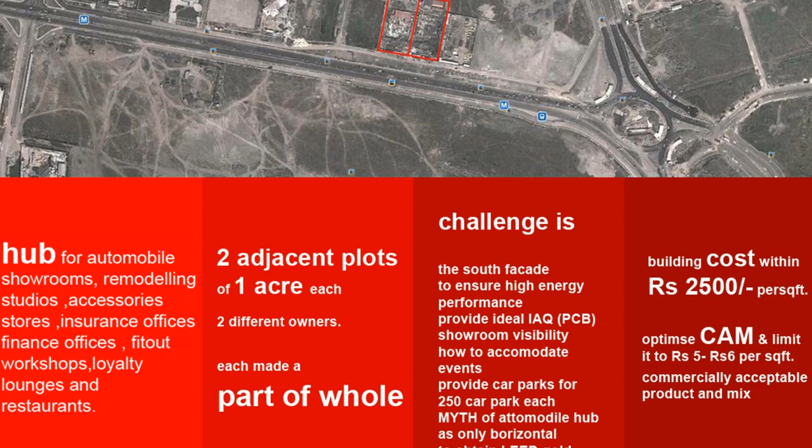The other challenge was how do we take the workshop, which is on a high level, and give it a facade that made sense to a car or an automobile. It's a character we had to weave in, which had to do something with technology. There were offices also, which were also looking in front.

All the adjacent plots had buildings, and we didn't want to look straight into them. Neither did we have the liberty to carve out offsets of gardens and greens. So it was almost like a tight site, wanting to survive mathematics in depleting real estate. That's where the facade plays an important role, and I want to take you through the journey.

So the entire thing started with a site. As I told you, they wanted a site, and they also wanted the building to perform better. A green building is okay, but beyond green or LEED certification, what can we do?

We tried to say, let's get what the city lacks. The city lacked green altogether. We didn't have green, and this 2 acres barely could provide any virgin green. So we looked also at the program. Can the facade also take care of green? Can we actually have substantial green on the facade without reducing the FAR?

There was a need to get quality air induced into the building, because south was the highway, and Rajarhat, being a developing new town, has more dust in the air, which actually can be tapped for fresh air. So we had to do some kind of filtering in the system also.

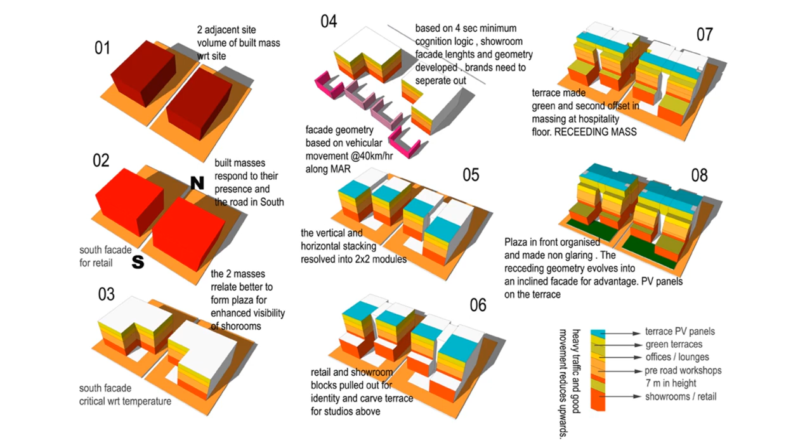The workshop, which basically caters to the pre-road fit-outs and a little bit of cleaning, was about 7-meter heights, which didn't need as such a presence from the roadside, but wanted to take in light and fresh air, and was not conditioned. Above that, we had offices which had the view as well as everything right in front facing the sun.

So we took a story from the top. We had offsets which take care of green. The green would reduce the glare, because normally these huge extensive glass facades add to the glare on the road. While driving, there would be a sharp glare on your windscreen, from your building reflecting a lot of sunlight and glare onto pedestrian traffic as well as vehicles.

To add to this, we also had a metro moving at a level almost about 11 meters from the ground level. That was another kind of noise we had to cater to. So we were actually looking for a kind of opaque performing facade also.

On the above levels with the offices, we tried to take care of layering of PV cells. Can we actually encapsulate a skin system which will have polymer solar cells that will add not only to reducing the glare component and insulation, but will also help in producing energy, so as not to be too impervious to allow for the view.

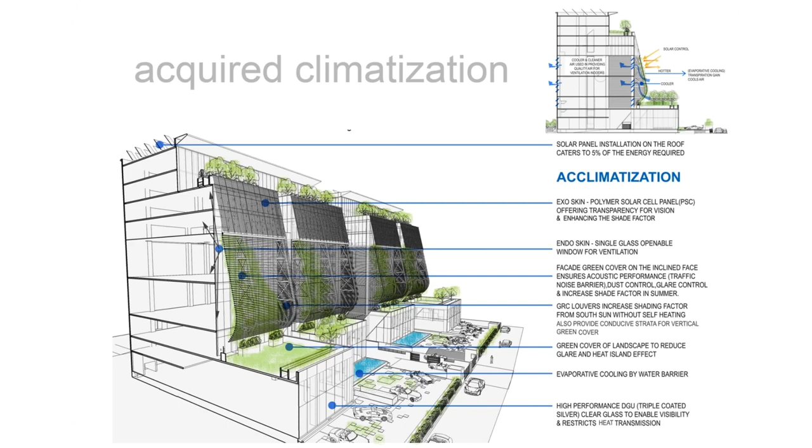In the lower level, when we had the workshop, we had a skin system which had an exoskin system with GRC louvers, and the massing was done in the manner that they were formed as building facades, with a louver system which would allow the wind to pass through.

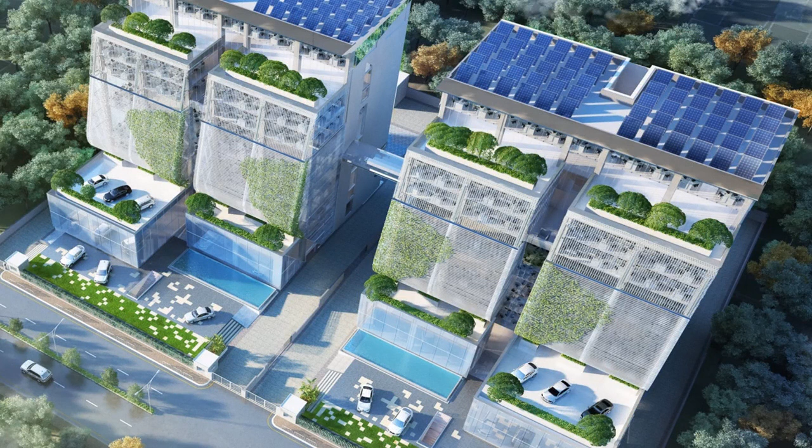The plantation above would actually increase the green proportion and reduce the glare, the reflected glare basically. That filtered air which goes through those green louvered facades was tapped and taken inside the workshop, allowing fresh air from there.

Because it was green, we could expect a certain amount of transpiration performance, reducing the heat load. So that would add to a little better performance in terms of fresh air and reduced temperature, adding to the indoor air quality and temperature both.

In this entire effort, we were giving birth to a huge green facade in the design, making the entire process interesting and intriguing. This would keep on growing over the years, making it much more green, because Calcutta as a city is lacking a green cover, and the entire effort was, can we add to a visual green?

GRC instead of aluminium helped us with the louver system to take care of the extreme heat, because the extreme heat of metal would not allow the creepers and the green to grow onto them. GRC allows that to happen.

In the lower levels, we had the reflecting water pool, which actually enhanced the local performance in terms of temperature rating, etc., in the plaza areas.

The plaza was done basically having the building blocks structure themselves, making a big plaza, which would take care of a second showroom. It would actually have a second cars' open air showroom, or a flea market kind of system. So not only were they selling new cars, they would also allow Wednesdays or Thursday evenings to have the second-hand open car layout in the entire front area.

So it's a building which will actually bring in a culture of how we see cars and how we associate with cars. And when we have hybrid cars going on electricity, we should also have buildings and facades which generate more electricity, reduce glare, produce more green, and have a character which is much more sensitive and future progressive.

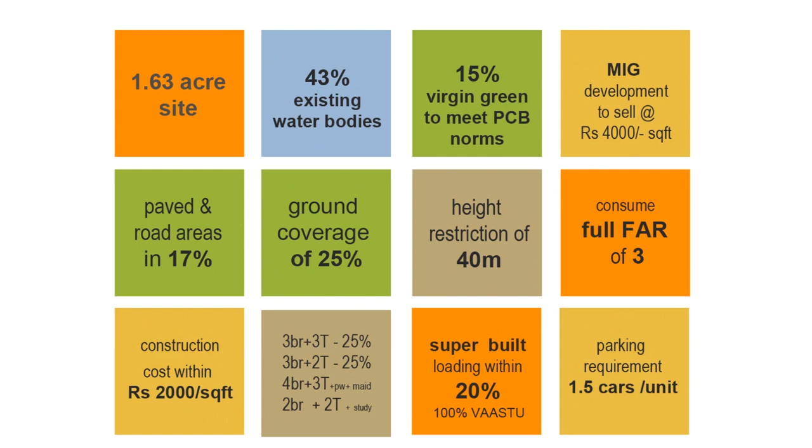That was it, how we wanted to make a focal point. So there were 4 blocks designed to have 2 flanks arranged in a pattern, so that in the heart we can have the water body, the green, and the biodiversity. We had to keep the wind access, the solar performance, everything intact.

So we didn't want much glass, because my buildings were either looking into east or west. But we also wanted a shading device to become interesting. So we took inspiration from the water itself. We started understanding how water behaves when it comes in contact with air and light. When it comes in contact with light, it shimmers. When it connects to the wind, we have waves.

Both of them were having a fantastic mathematics. They were all sinusoidal. The glitter was mathematics of light and blinking, which is again very harmonic. And when it came to wind, the waves are harmonic.

So we wanted to have a facade. Can we have a facade which emulates and gives identity to these apartments in terms of its own green area? Because such buildings, such social housing, tend to be very flat and completely dense. So we wanted to carve in apartment and balcony. And we wanted to add that they would have their outdoor units coming and clinging on the facade itself, so that becomes a big problem.

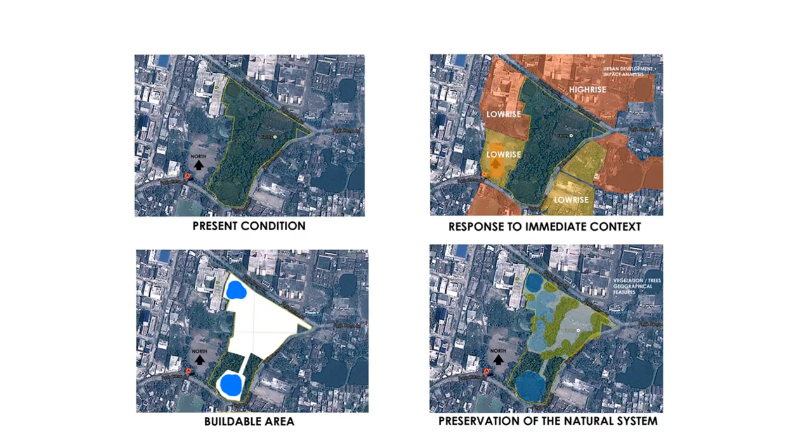So we had this kind of a step-out balcony given to them, 700 wide balcony, which would add to the interest of putting some green. If you want to put your outdoor unit, you can put it with some kind of nice fascia. You want to walk over and clean your facades, you can also do that. So every apartment had this walk-up ranging from 1.2 to 0.7 meter in terms of projection, and that became my continuous step-out balcony, which was inspired by the sinusoidal waves.

The planning was very simple in terms of master planning and unit design, essentially very compact. We didn't want the utility balcony to be seen from outside, so all the utility balconies were inside. There's something very important to understand: utility balconies should not be brought out. It's an essential component, but it has the freedom to become ugly. It's bound to happen that you cannot have control on utility balconies. How do you contain them within the building envelope? If you really want to control a facade, that is more important in the planning, and that doesn't come by simply facade management. It comes within the planning.

So here we wanted to use this within the planning system. So all are inside the core, but they're breathing. Each one breathes, and they're well connected and breathing. On the outside comes the interesting sinusoidal balconies going together. Each apartment would have green, personal green.

In fact, we were intending to put this green in those bulges of the balcony, so that when you acquire a facade, when you enter a campus with multiple owners, all the owners present to you a unifying character. So this was unifying the entire facade, giving it a green outlook, and also giving a character which said, why this? Why the sinusoidal, why these curves?

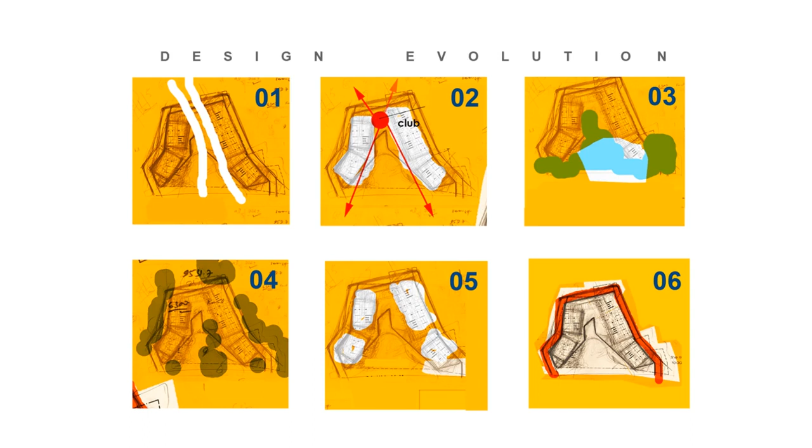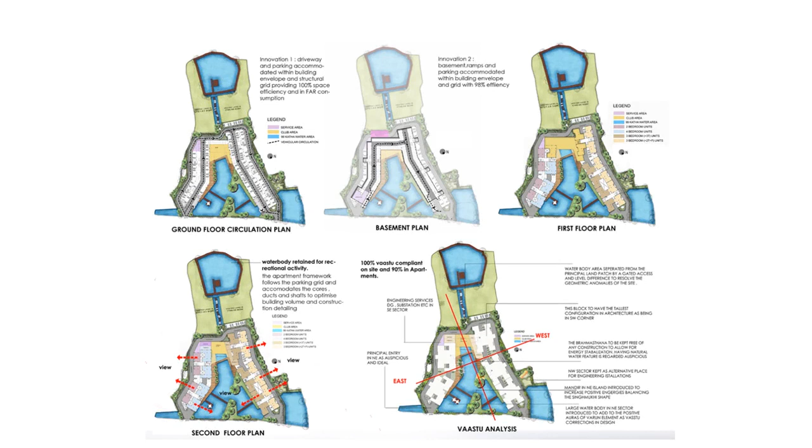So we made a small equation out of these waves and tried to apply it in 4 levels to see how it works. It came out of a little program that we started to work out, and this became an interesting thought process, which can actually be taken up by many such high density developments by introducing a small step-out balcony. Not only will they add to a shade factor, they will add a chhaja to the entire facade, cutting off the glare, but they can also add a character which can be sensibly used for ODUs, greens, as well as personalizing.

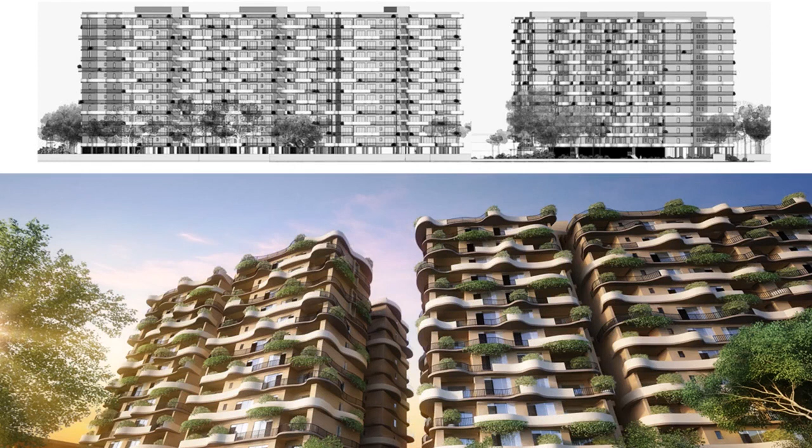So we can expect one person to have bougainvillea, the other person to have something green, and that would add a lot of interesting facade by flora. First we have to provide for it, and then the world says yes to it. And that's the reason we thought we'd like to share this with you. It adds a lot of sense and sensibility to our design, and facades which are more sensible and give sense to the city and people around should be done, rather than just graphic interventions.